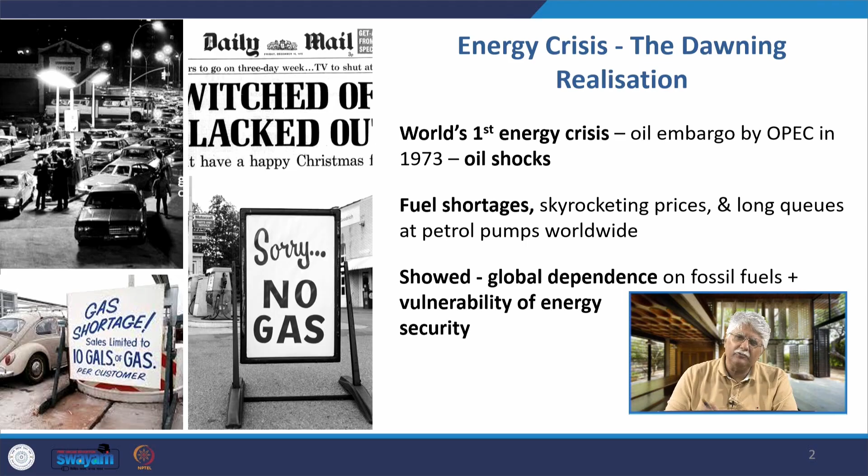If you want to look at the beginning of the whole problem, it began with the energy crisis the world faced for the first time in 1973. There was a dawning realization about the problem of energy. There was an oil embargo by the oil producing countries, the organization called OPEC, and this sent oil shocks all over the world. There were fuel shortages, skyrocketing oil prices, long queues at petrol pumps, and it showed there is a global dependence on fossil fuels and the vulnerability of energy security.

Then the impact of carbon emissions on climate. The damage from carbon emissions began to be understood from the 1960s, but there was a strong global recognition in the 1970s to 1980s. Early reports started coming out as early as 1979 with the report Carbon Dioxide and Climate: A Scientific Assessment, the Charney report. In the 1980s, there were private documents by oil companies like Shell and Exxon, kept secret, warning about climate change. Then important milestones came about.

In 1987, the Brundtland report came out, and that framed sustainable development, globally influencing building policy. In 1990, the first green building standard certification called BREEAM came out in the UK. BREEAM stands for Building Research Establishment Environmental Assessment Method. It focuses on energy, materials, pollution and health. In 1993, the US Green Building Council, the USGBC, was formed, and the LEED rating system was established in 1998. Around this time, concepts like life cycle energy and embodied carbon began appearing in research work.

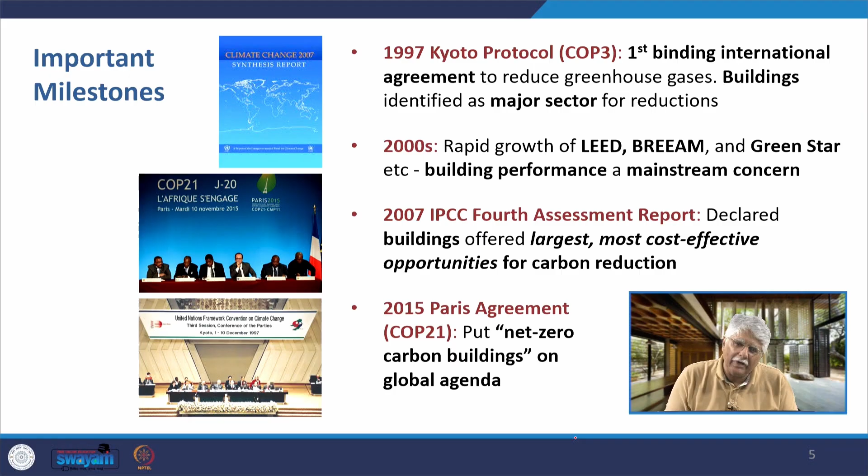Then an important milestone in 1997 was the Kyoto Protocol, called COP3, the first binding international agreement to reduce greenhouse gases, and buildings were identified as a major sector for energy reduction or carbon reduction. In the 2000s, there was rapid growth of LEED, BREEAM, Green Star, etc. Building performance became a mainstream concern, and in 2007, the fourth IPCC assessment report declared that buildings offered the largest, most cost-effective opportunities for carbon reduction. The 2015 Paris Agreement, COP21, put net zero carbon buildings on the global agenda.

Now, probably last year a UN report by the IPCC came out that declared what was called Code Red, that global temperature was likely to rise 1.5 degrees Celsius in the next 20 years. But 1.5 degrees Celsius from what? 1.5 degrees Celsius from the time of the Industrial Revolution. Global temperature would rise 1.5 degrees Celsius above the temperature during the time of the Industrial Revolution. If that happens, there will be irreversible climate change and global warming.

Already we are seeing the impact of tremendous climate change. Literally a climate change catastrophe is happening with extreme heat waves, drought, flooding, melting glaciers, rising sea levels, especially in areas where we never expected before. Floods, for example, in Frankfurt, droughts in areas that did not witness them before, forest fires are happening. So as a result of this, globally there have been caps established on the amount of carbon emissions nations can emit.

For India and China, the cap for bringing the country to net zero carbon level is 2070. That is, by 2070, India is striving to become a net zero carbon nation. Currently, in global carbon emissions, China is at the forefront with 27%, USA at 11%, and India is the third largest carbon emitter with 7%.

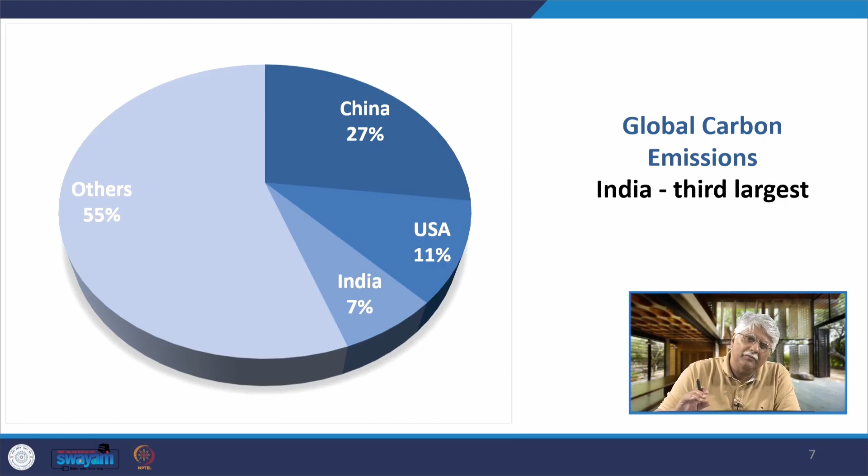Now, when we talk of carbon emissions or energy consumption in buildings, what are we really talking about? We are talking about two things. One is what is called the embodied carbon or embodied energy, that is the energy required to manufacture the materials used in construction and to transport them to the site of construction, the overall energy that is embedded in the materials.

The second is the operational energy or operational carbon, that is the energy that is consumed during the operation of the building. Data reveals to us that buildings contribute a total of 38% of carbon emissions globally. They are the major contributors according to the 2020 Global Status Report for Buildings and Construction by the United Nations Environment Programme.

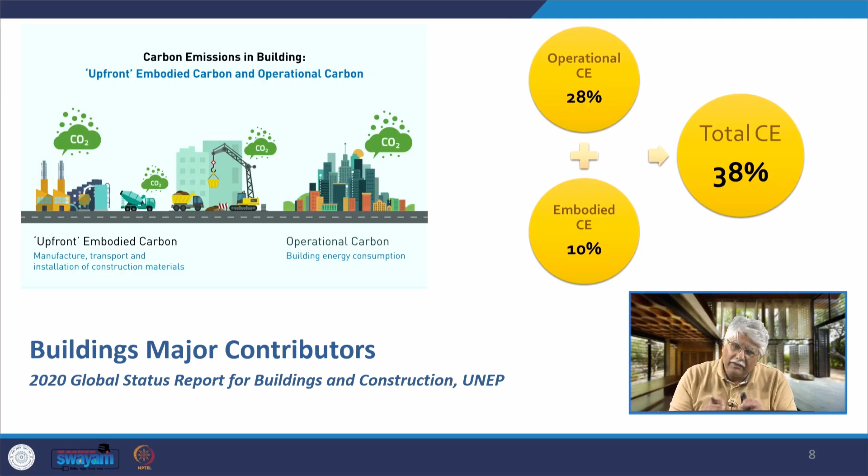So, that is why it is vital for us to target buildings to lower carbon emissions, to lower the energy that they consume. Now, in order to understand the difference between what is a sustainable building and what is a green building, the concept of sustainable development or sustainability incorporates three principal things. Number one is the environment, number two is the economic aspect, and number three is the social aspect or the people. All three put together lead to sustainability or sustainable development.

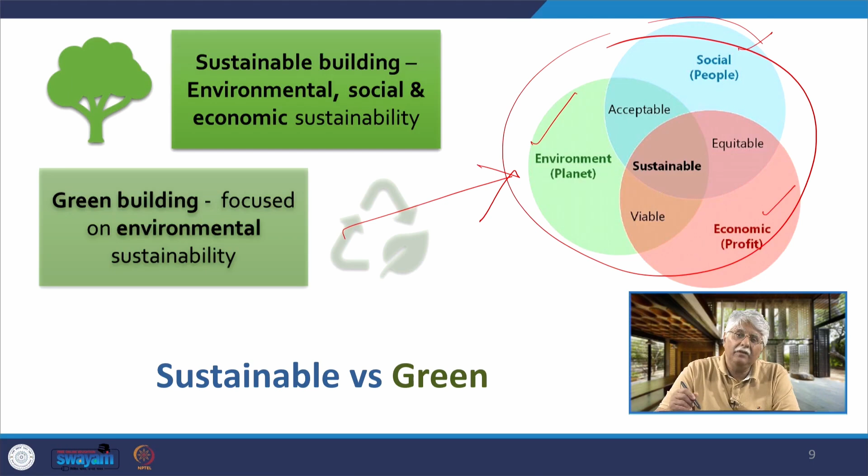But green buildings specifically focus on the environmental aspect of sustainability. That is the difference between being sustainable and being green. There has been a lot of impetus to make green buildings, and now we are also moving towards more and more sustainability. That means the social aspect and the economic aspect is also becoming important.

In fact, when we look at the sustainable development goals that were set up in 2015 by the United Nations General Assembly, they were intended to be achieved by 2030. Out of these SDGs, there are 9 SDGs that are a direct impact of green buildings. So what is a green building? I will give you very simple definitions. You can go and read the detailed definitions later.

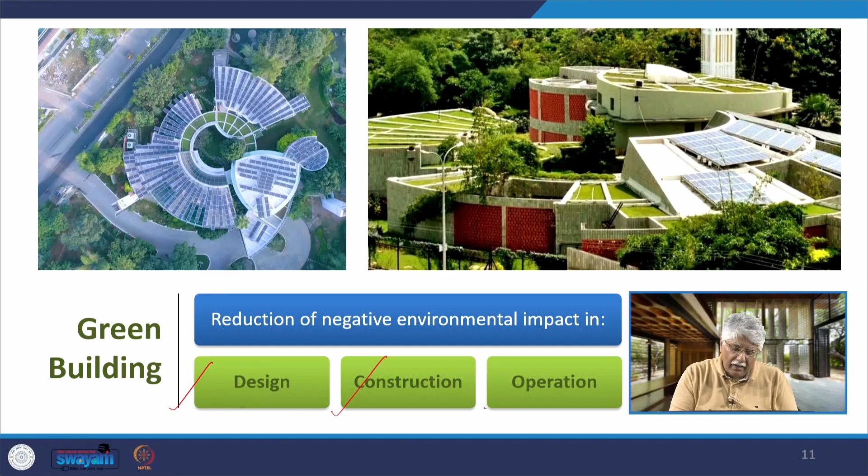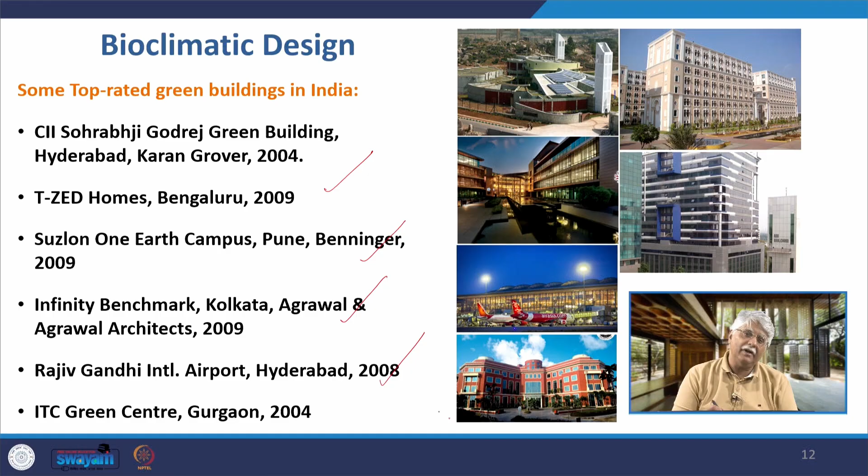So, a green building is the reduction of the negative environmental impact through the design, the construction and the operation of a building. When we talk of bioclimatic design, there are some top rated green buildings that we have in India. The one we will be looking at is the CII Godrej building in Hyderabad by Karan Grover. Then there is the T-ZED Homes in Bangalore, Suzlon One Earth campus by Christopher Benninger in 2009, Infinity Benchmark in Kolkata, the Rajiv Gandhi International Airport in Hyderabad, the ITC Green Center in Gurgaon in 2004.

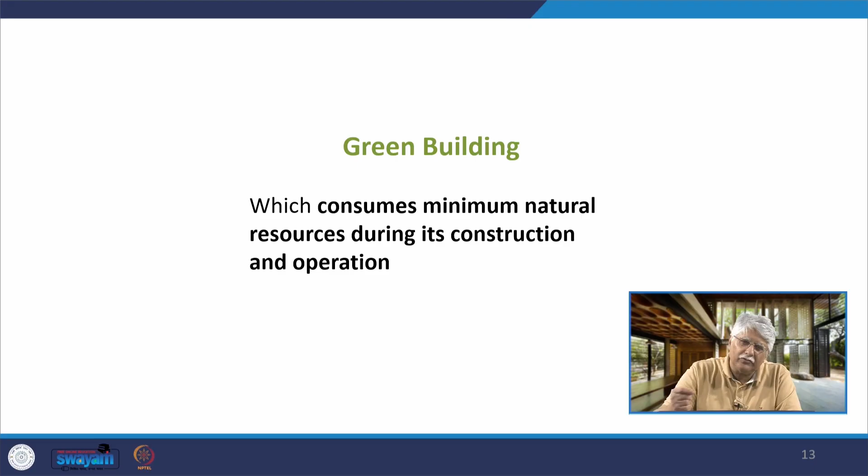So, a green building is that which consumes the minimum natural resources during its construction and operation. In a green building, there is increasing efficiency with which buildings use resources, energy, water and materials, while reducing the building's impact on human health and environment through better siting, better design, better construction, operation, maintenance of the building, and finally the demolition and removal of the building. The entire building life cycle is a model of a green building.

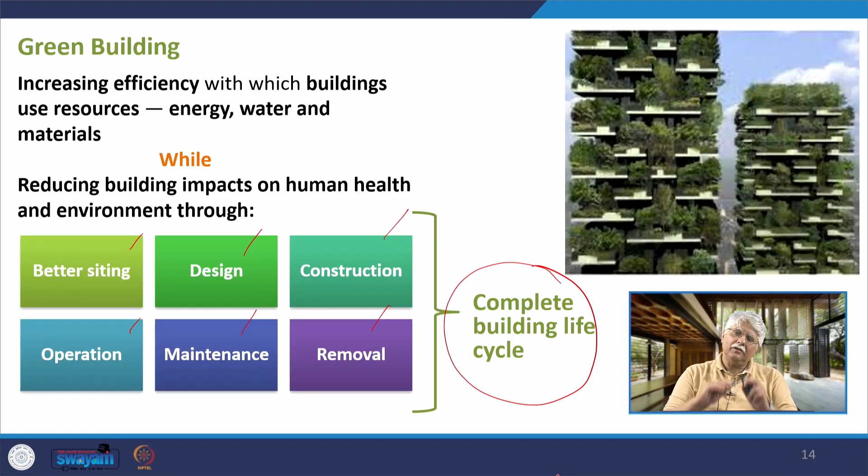So, when we talk of life cycle energy requirement, again we will look at these two things I have just mentioned: the embodied energy, which is the energy needed to quarry, manufacture and transport materials used in building construction. Operation energy is the energy to operate the building used by occupants for heating, cooling, ventilating, lighting, operating equipment, etc. in the building. How do you reduce operating energy?

Today in this presentation we are not looking at the embodied energy, embodied carbon aspect of it, though that is also considered; more energy efficient, low carbon materials need to be used as a part of the overall green building concept. But when we talk of operating energy, two things are important. One is energy saving. How do you save energy? There are passive and active means to save energy in a building.

By improving insulation, by automated ventilation controls, that is the active part, by lighting control using natural light, by lighting control using motion detection sensors, by high efficiency light fixtures, by rooftop planting, which are called roof gardens today. Through all this we are trying to save energy. The second part is energy making through, for example, photovoltaic generation, use of solar PV panels. So on one side we are saving energy, we are lowering the amount of energy the building consumes. On the other side we are making energy.

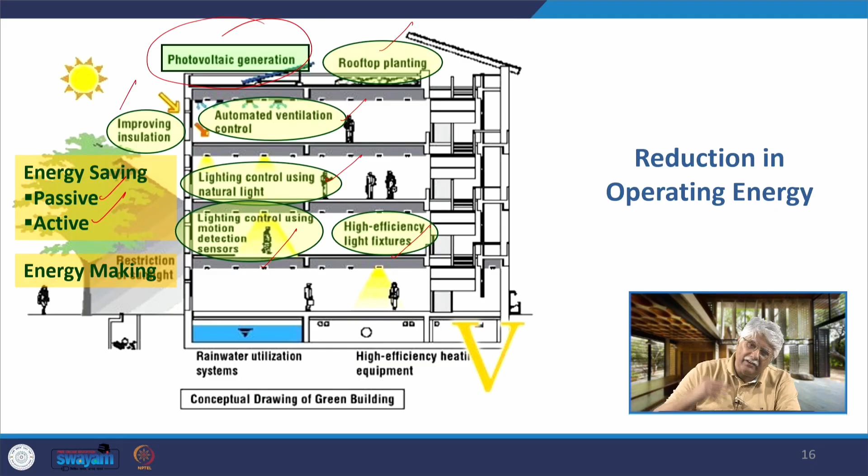Why make buildings green? Not only is it important because of the most critical issue that we need to lower carbon emissions, but also studies reveal that productivity gains up to 16% happen with green buildings because they reduce absenteeism, they improve the work quality and the overall indoor environmental quality. Therefore, there are environmental, economic and social benefits for all building stakeholders. So here we are actually looking at the very essence of sustainability.

Though it is a green building, it is also impacting economic and social aspects, because there is less absenteeism, the indoor environment is better, people find it better to work. Economically that benefits the companies or the corporations. So owners, occupants, general public, everybody benefits with these green buildings.

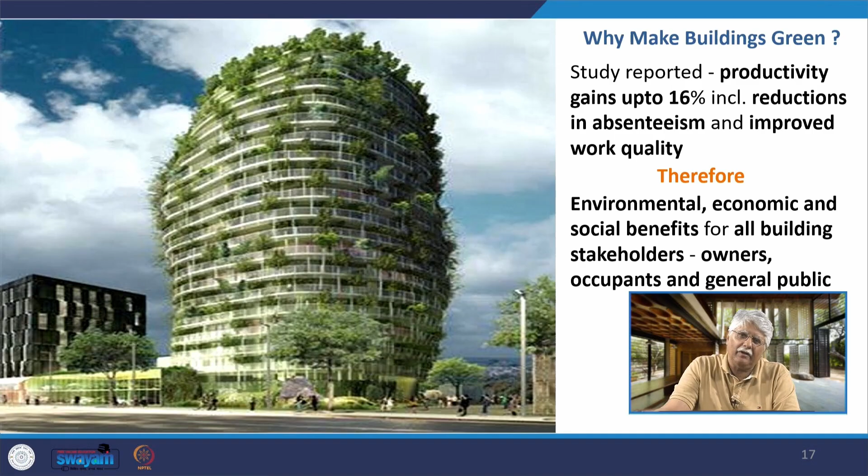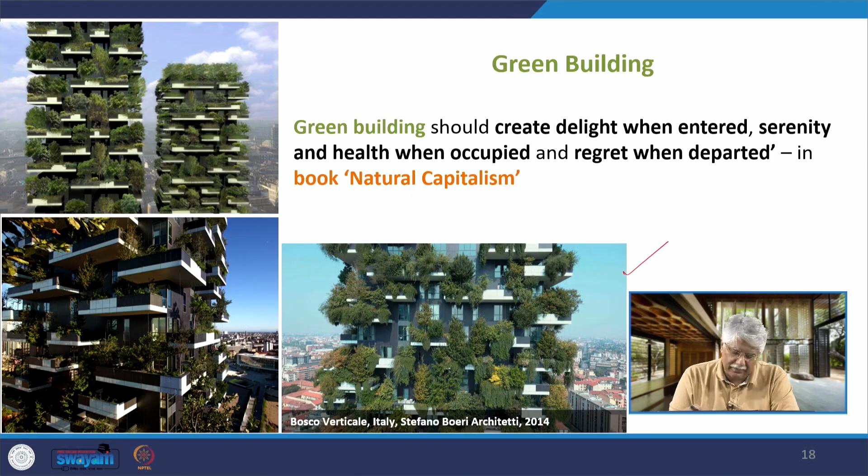Green building should create delight when entered, serenity and health when occupied, and regret when departed. This is a statement from the book called Natural Capitalism. The building that you are seeing in this slide is the Bosco Verticale, the vertical forest in Italy by Stefano Boeri Architetti in 2014. There is another building, the One Central Park in Australia by Jean Nouvel, another green building in 2014.

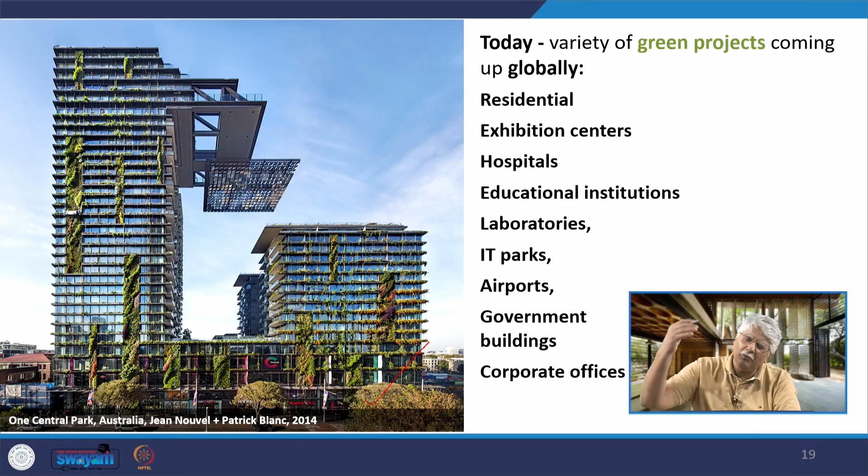Today there are a variety of green projects coming up globally: residential, exhibition centers, hospitals, airports, laboratories, IT parks, corporate offices, government buildings, so many building typologies in which green buildings are being made. Why are people attracted to green buildings?

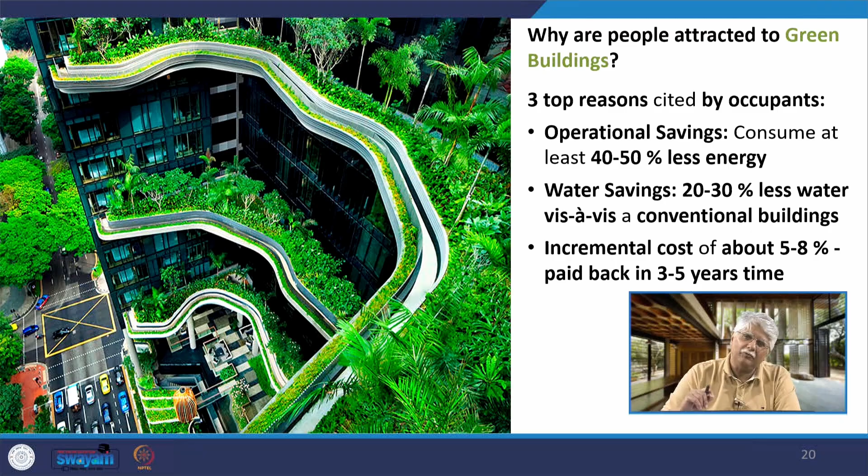The top 3 reasons are, of course, operational savings, 40 to 50% less energy is consumed. There are water savings, 20 to 30% less water vis-a-vis a conventional building. The incremental cost of making a green building, 5 to 8% over and above a conventional building, is paid back in 3 to 5 years, what is known as the payback period.

So there are better daylight and views. Like I said, the working environment improves, access to daylight and views is there, productivity of the people goes up, air quality improves, it is fresh and healthy. Interior materials are also used in a way that they have low carbon emissions.

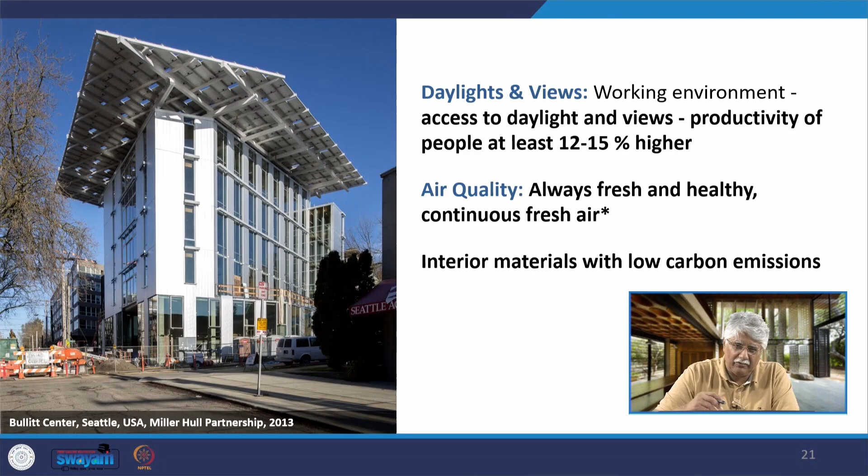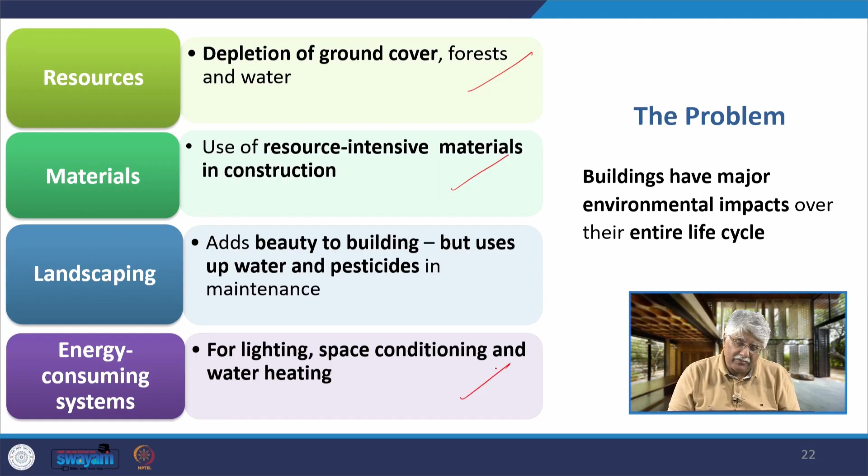Now the problem was that buildings have major environmental impacts over the entire life cycle. Resources: they cause depletion of ground cover, forest and water. Materials: we use resource intensive materials in construction. In landscaping, though they add beauty to the building, we use water and pesticides for the maintenance of the landscape. We use energy consuming systems within the building. We use high-tech controls, building management systems that add intelligence to the buildings but require a lot of energy.

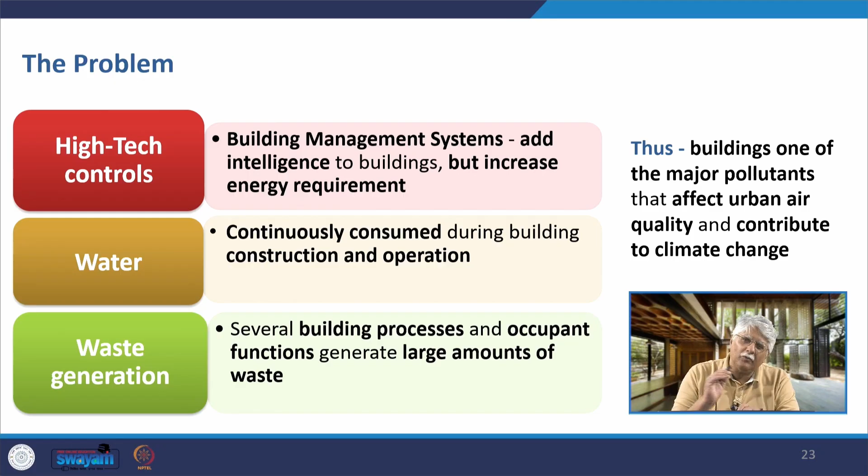Water is continuously consumed during building construction as well as operation, and there is waste generation. Several building processes and occupant functions generate large amounts of waste. Thus, buildings are one of the major pollutants that affect urban air quality and contribute to climate change.

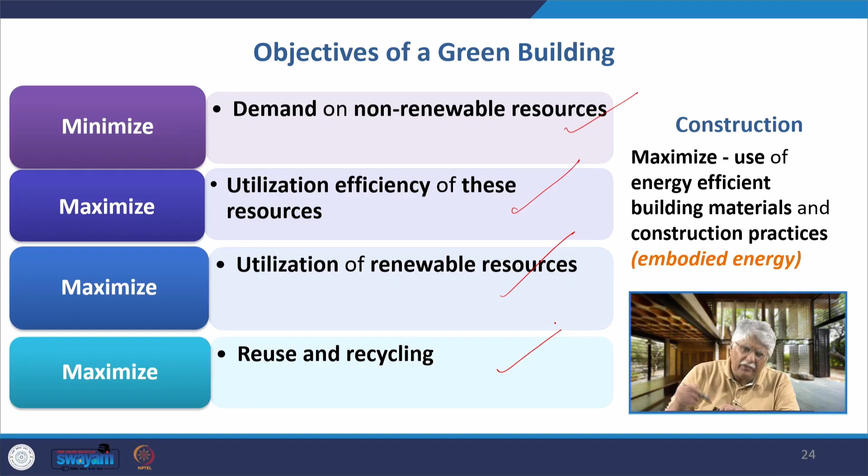That is why the objective of the green building is to maximize the use of energy efficient materials and construction practices. So, minimize the demand for non-renewable resources, maximize the utilization efficiency of the resources we use, maximize the utilization of renewable resources, and maximize reuse and recycling. All these concepts are evolving even further today.

So we come to the CII Godrej Green Building Center in Hyderabad. Why is this an important study? Not only for Indian architecture but global architecture, because this is the first structure outside of the USA to receive a platinum LEED rating. In this presentation, I am not giving you the entire description of the LEED and GRIHA green building certification. You can read it up, but the LEED rating was given earlier by the USGBC, now we also have the Indian Green Building Council, the IGBC.

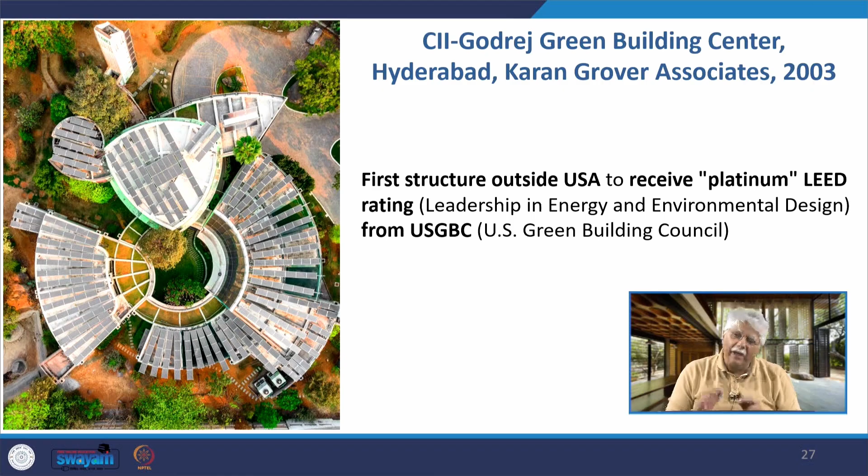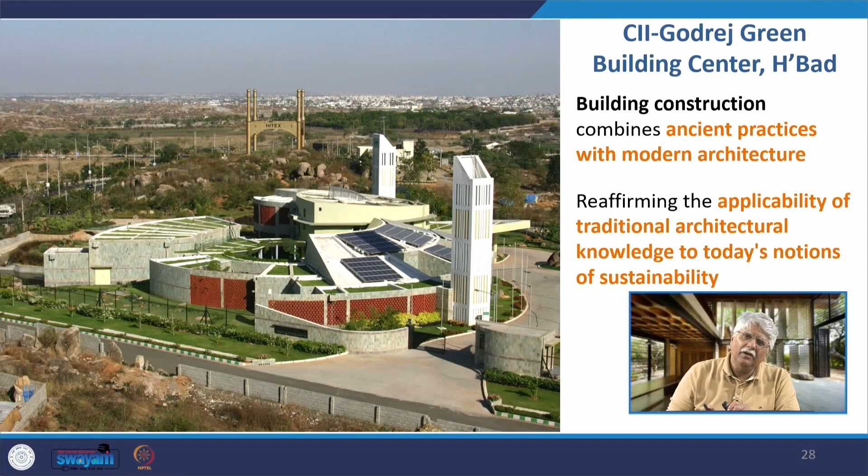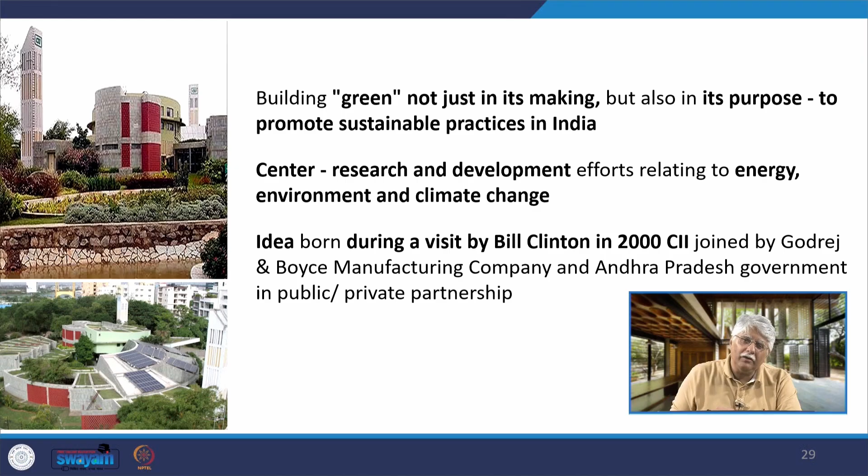The CII Godrej building combines ancient practices with modern architecture, reaffirming the applicability of traditional architectural knowledge in today's notions of sustainability. The building is green not just in its making but also in its purpose to promote sustainable practices in India. The center is for research and development related to energy, environment and climate change, and the idea was born during a visit by the then President of America Bill Clinton in 2000.

Karan Grover Associates in Baroda are the architects behind it; they developed a design scheme to respond to both the cultural and the environmental context. The building was to be a showcase for energy efficient, eco-friendly architecture, an integration of age-old practices with sustainable practices using modern technologies.

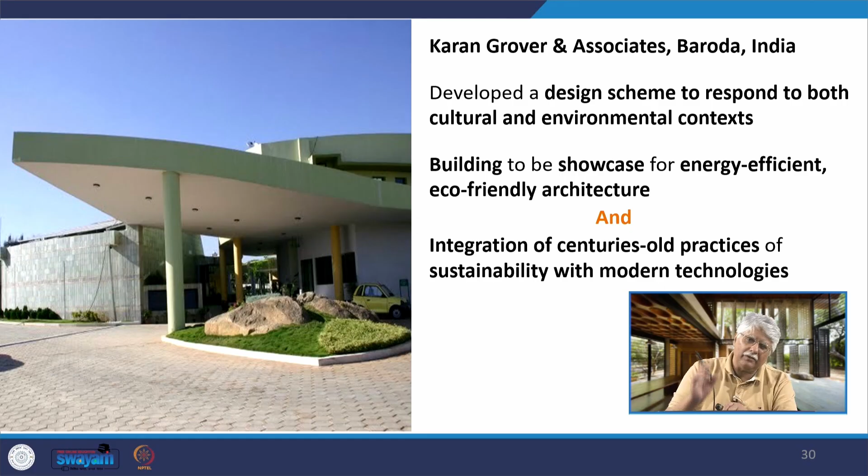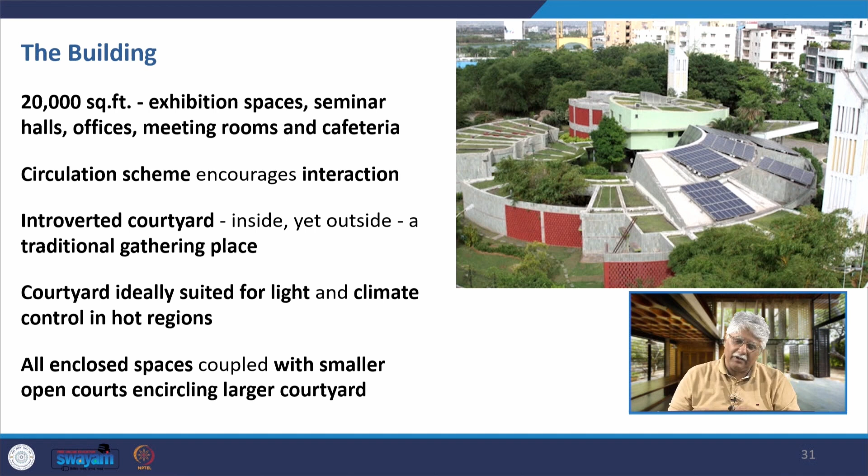The building is 20,000 square feet of space with a circulation scheme that encourages interaction. It's got introverted courtyards, inside yet outside, leading to traditional gathering spaces. They're ideal for bringing natural light into the building and for climate control in this hot region. All enclosed spaces are coupled with smaller open courts which encircle the larger courtyard.

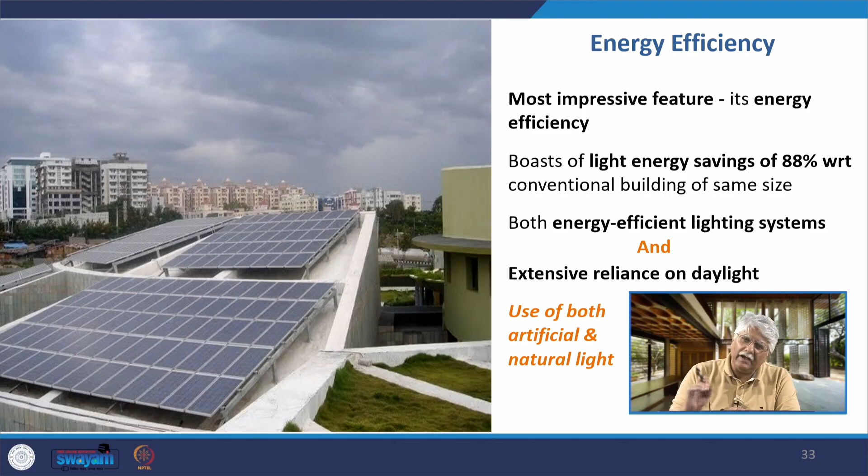When light is insufficient, sensors trigger energy efficient electric lights. There are also dimmers that automatically control illumination levels, turning lights off when it is unnecessary. There are occupancy sensors that prevent lights from being switched on at unoccupied workstations.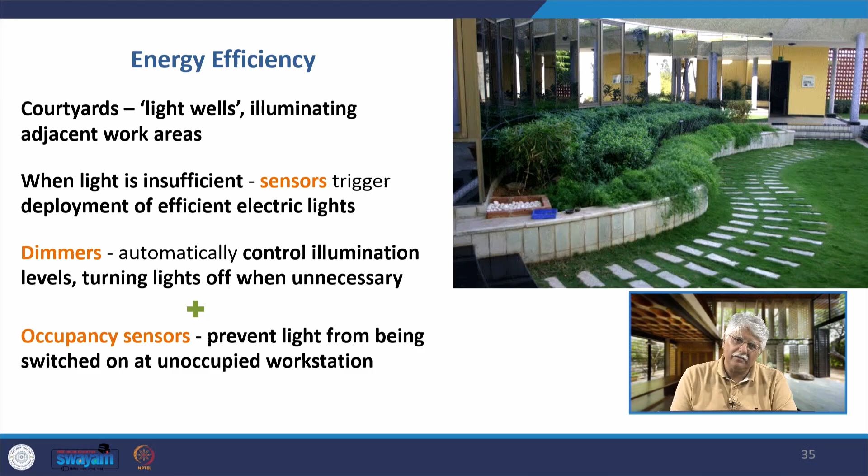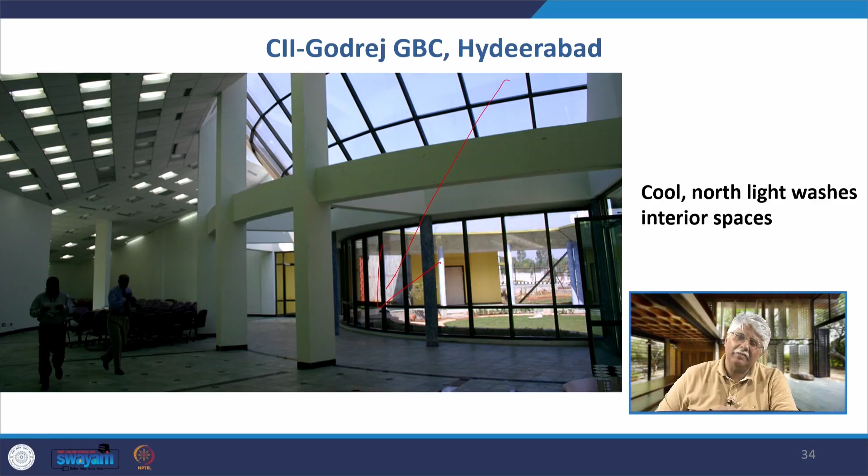Please also remember that this building was made much earlier, in 2003. Over this time, much more development has taken place in green building or energy efficient design. Far more new strategies are now being implemented, but we are looking at it as an important landmark in green building design in India. The building layout ensures that 90% of spaces have natural light access and views to the outside.

In some areas, jalis are used to prevent glare and heat gain while ensuring adequate daylighting and views. The jali also gives aesthetic appeal to the space. A contemporary strategy for energy efficiency is the use of solar photovoltaic cells. There is a rooftop grid that provides about 24 kilowatts; approximately 16% of the building's electricity needs are met through the solar PV panels.

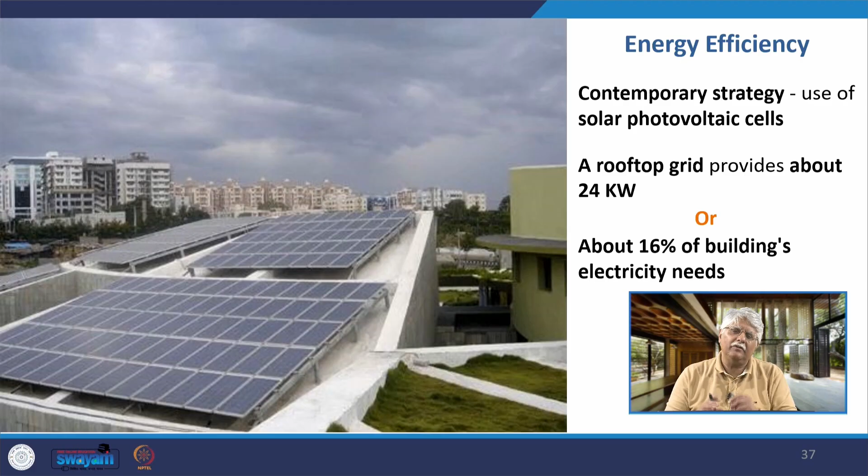And for energy efficiency, another traditional method from the Middle East has been used, that is these two wind towers that you see here. These wind towers are traditional elements that catch air at a height and cool it as it passes down the tower. That cooled air is then pumped into the HVAC system, or the air handling unit of the air conditioning system, and this air has been cooled by up to 8 degrees Celsius, bringing about a substantial reduction in the air conditioning load. The roof itself is heavily insulated and reduces the overall cooling load.

Just to repeat this again, the hot air from the top is pulled into the tower, and as it comes down it is pre-cooled within the tower, and this cooled air is fed into the AHU.

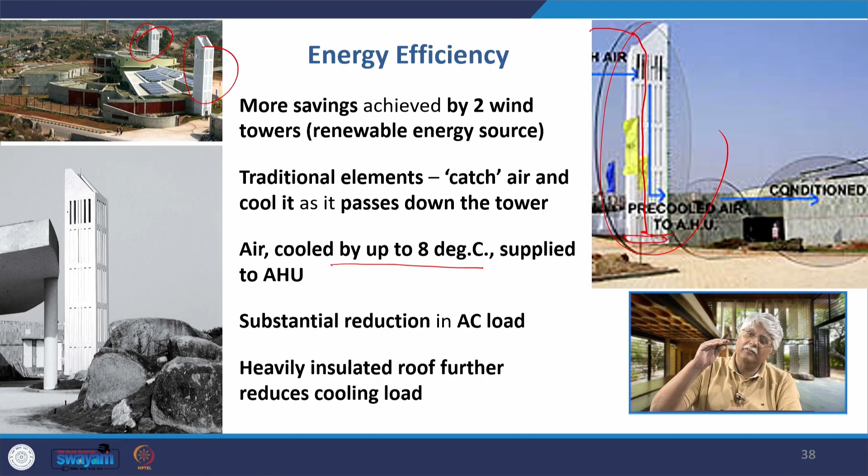So now what happens? For example, if the outside temperature is 45 degrees, the air conditioner has to work to bring that temperature down to, let's say, 26 degrees Celsius within the building. That is approximately 19 degrees of temperature drop that has to happen. But because of this system, that 19 degrees becomes just about 11 degrees Celsius, and that tremendously lowers the cooling load of the building. There is also sensitivity to the context.

Part of the green task is to minimize damage to the natural elements during construction and occupancy. Water flow, air quality, vegetation, topography, all aspects are looked at. The building form responds to a rocky site. The footprint of the building is kept small. The arrangement of spaces and varying levels of plinth are designed to respect the distinctive boulders. That is, the topography of the site is kept as intact as possible.

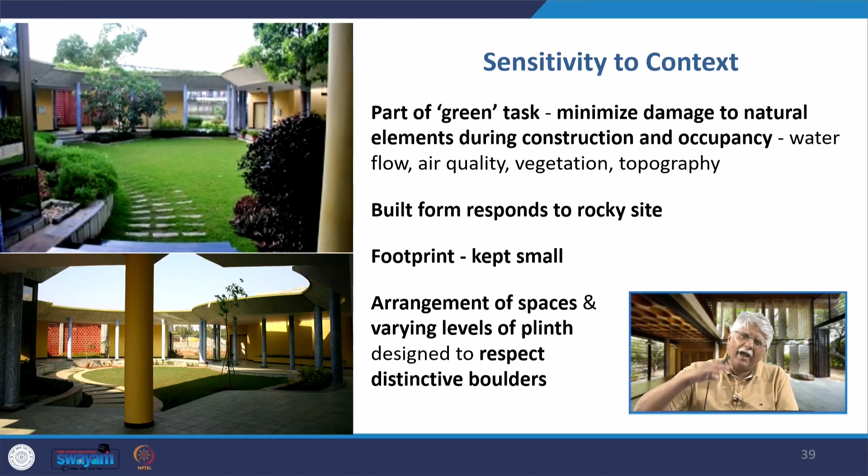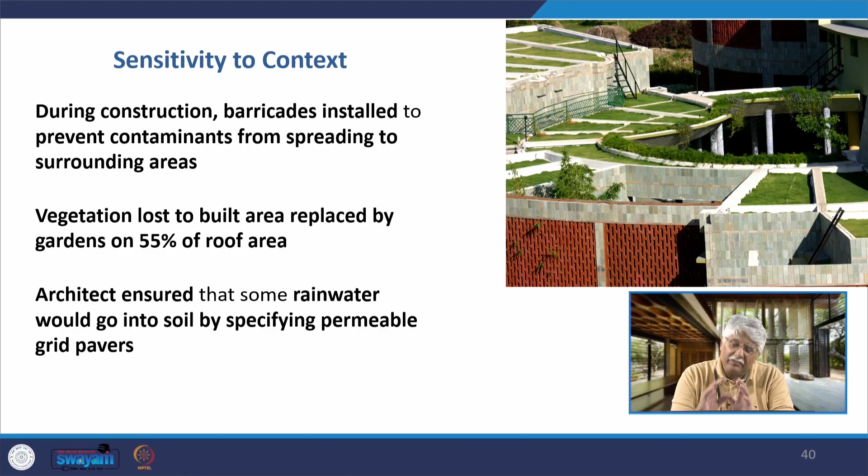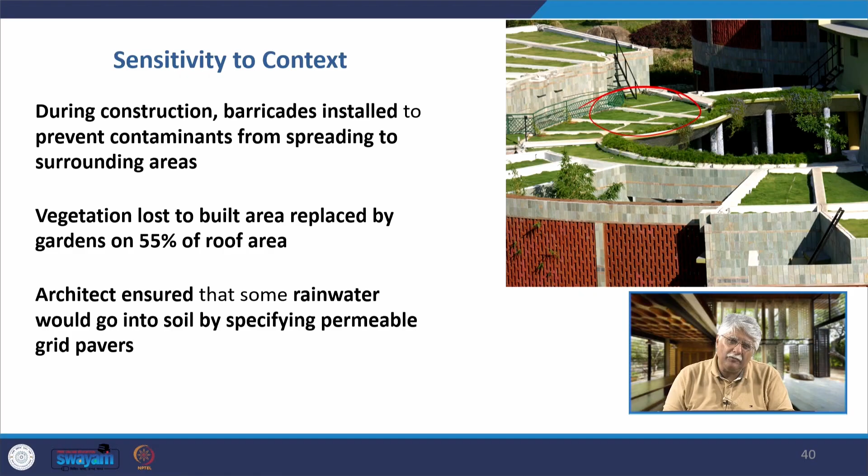During construction, barricades were installed to prevent contaminants from the site from spreading to the surrounding areas. The vegetation that was lost to the built area was replaced by rooftop green spaces or roof gardens, up to 55%. The architect ensured that some rainwater would go into the soil by specifying permeable grid pavers. The remaining rainwater follows the existing flow pattern of the site and is collected in a water pond. Another traditional method is that it is constructed at the lower end of the site.

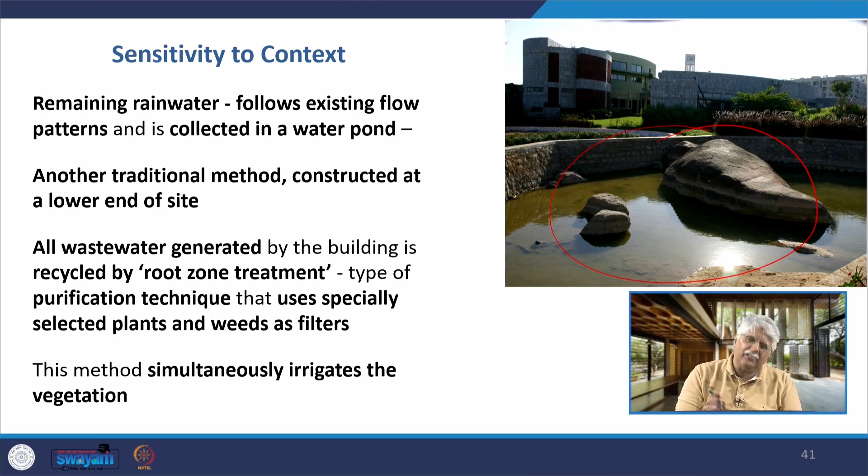All wastewater generated by the building is recycled by what is called root zone treatment. That is a purification technique that uses specially selected plants and weeds as filters. This method simultaneously irrigates the vegetation also. Treated water is also directed to the pond and used for domestic purposes. In addition, the building achieves a 35% reduction of municipally supplied potable water, in part by using low flush toilets and waterless urinals.

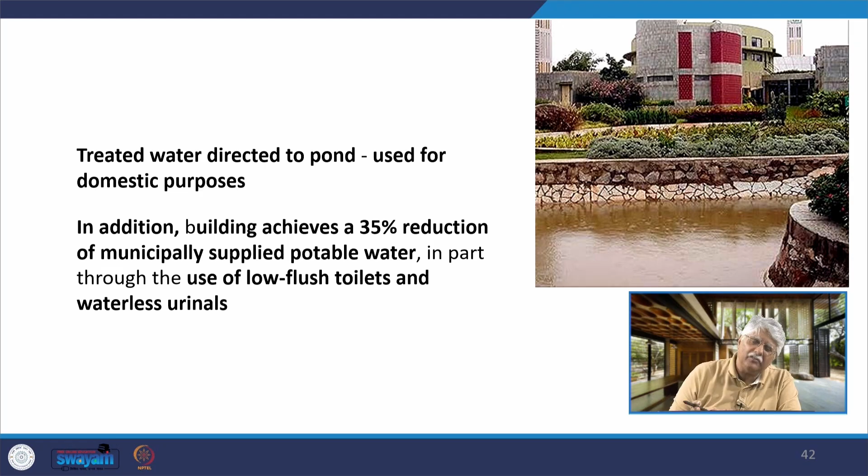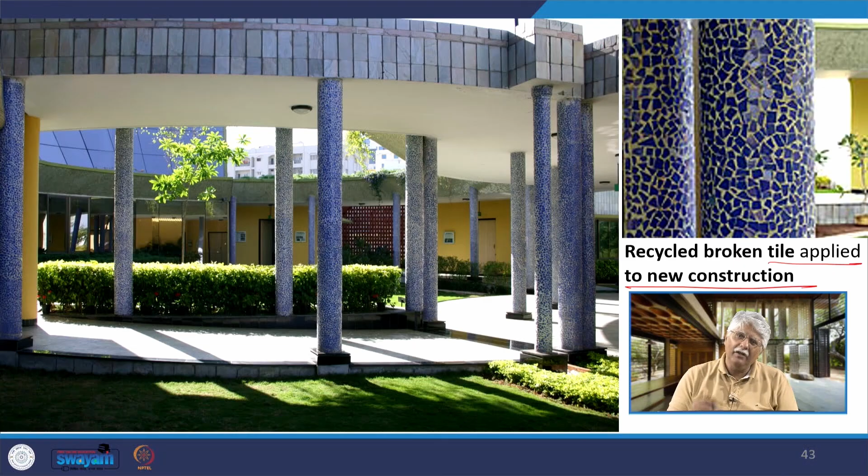Another aspect is, for example, the broken tiles from construction are reused by applying them on the columns as trencadís. I have already talked about it in the works of Gaudí, etc. The trencadís, the use of broken tiles.

Again, the sensitivity to context: so now shifting from the building to how occupant behavior is controlled, the building occupants are encouraged to minimize their reliance on fossil fuel based transportation. The building is located near a public transport station, so people can use public transport to come to work. Bicycle riders are treated preferentially. They are provided facilities like convenient parking, lockers and showers.

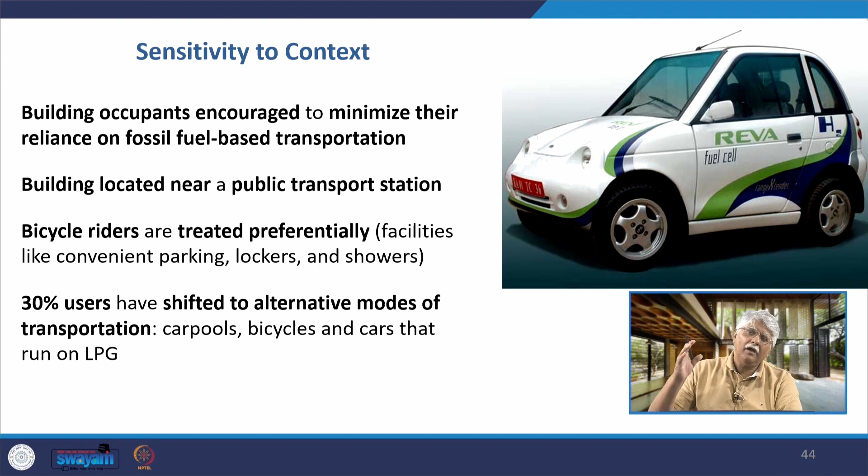30% of users have shifted to alternative modes of transportation like carpools, bicycles and cars that run on LPG. And I am talking about 2003. The center bought locally made electricity driven cars called Reva in the hope that employees will buy alternate energy powered cars in the future. Now this is an old story, because today EV cars are becoming very important even in our country. All over the world we are moving towards a situation where most of our vehicles will be EVs.

Documented reduction of harmful emissions through design, siting and construction indicates at least 62% in carbon monoxide, 63% in hydrocarbons and nitrogen oxides. That kind of reduction has happened through this building. This demonstrates that traditional knowledge is valid today and it can be used in conjunction with modern architecture to achieve these levels of sustainable design. It's earned a very high LEED rating of 56 credits, a platinum rating, which urges us not to turn our backs to history in our quest for modernity.

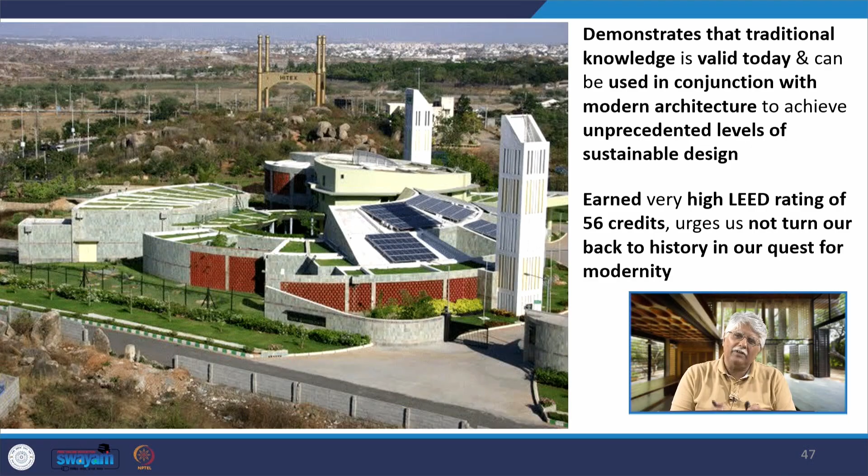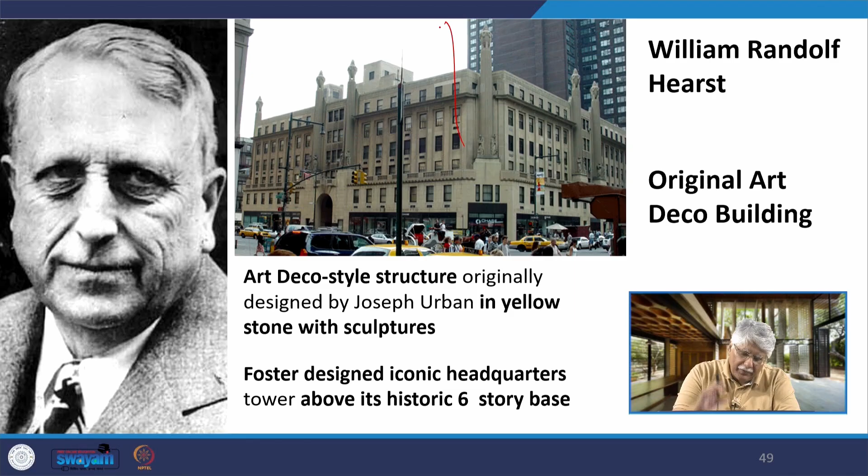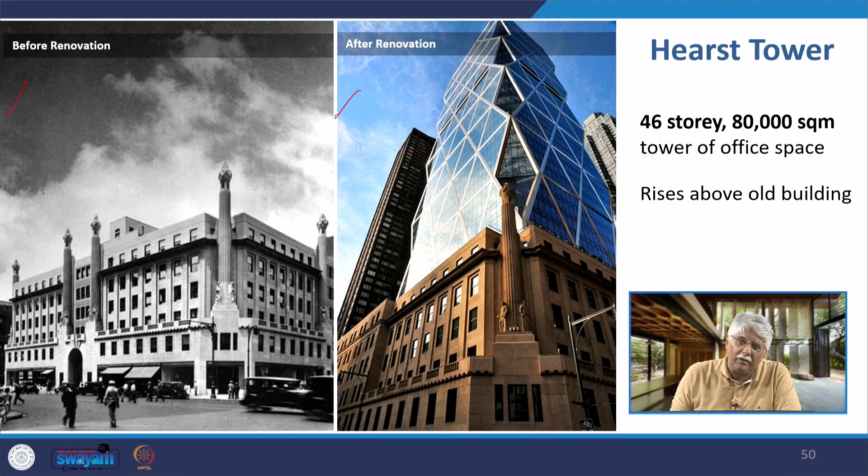So this building in 2003 formed a benchmark of green building design, but like I said, a lot of other developments have happened over time. Let's look at a benchmark building of 2006, the Hearst Tower in New York by Norman Foster, a green high-tech building. The earlier building there was the building by William Randolph Hearst, an Art Deco structure originally designed by Joseph Urban, and Foster designed his iconic tower above it while keeping intact the 6-story base. So this is the before renovation picture, this is the after renovation picture. A 46-story building, 80,000 square meters of office space, rises above the old building.

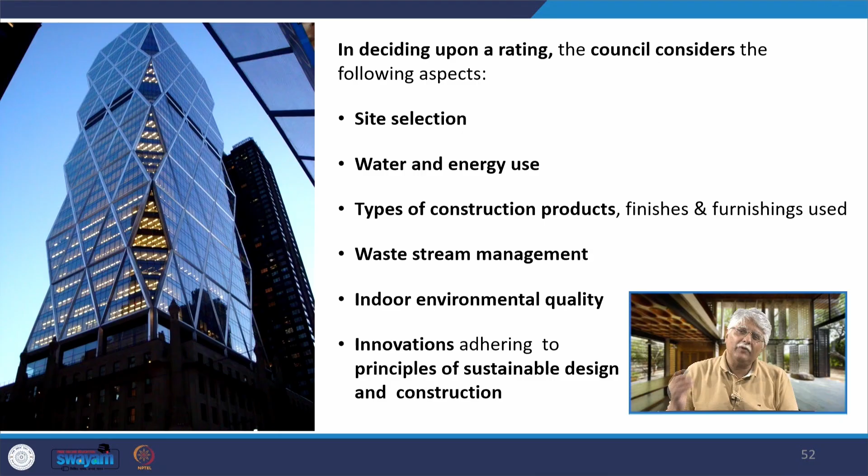A pioneer in environmental sustainability, it was the first commercial office building in New York City to receive the gold LEED rating for core and shell interiors. In deciding upon the rating, the council considers aspects like site selection, water and energy use, indoor environmental quality, the type of construction products used, etc. Over 90% of the structural steel used in this building has come from recycled material. About 85% of the original structure can be recycled for future use.

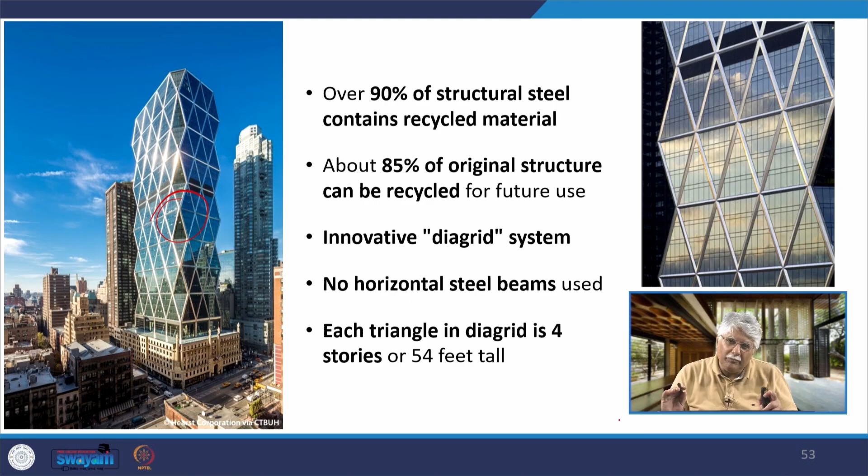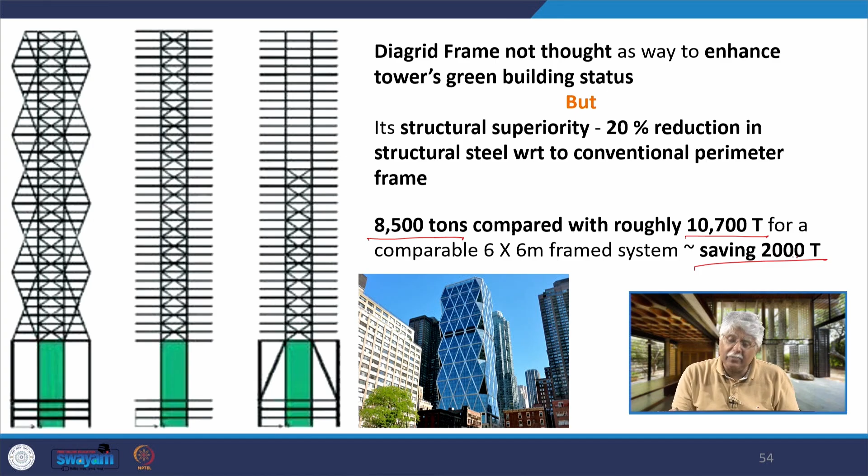It has an innovative diagrid system. We have already seen this in the Gherkin, or the Swiss Re building, also by Norman Foster in London. There are no horizontal steel beams used. Each triangle in the diagrid is 4 stories or 54 feet tall. The diagrid frame was not thought of as a way to enhance the tower's green building status, but the structural superiority of the diagrid reduced the overall steel required by 20%. That is, this building uses 8,500 tons compared to roughly 10,700 tons for a comparable building of this size, saving 2,000 tons of steel, a major contribution towards its green building status.

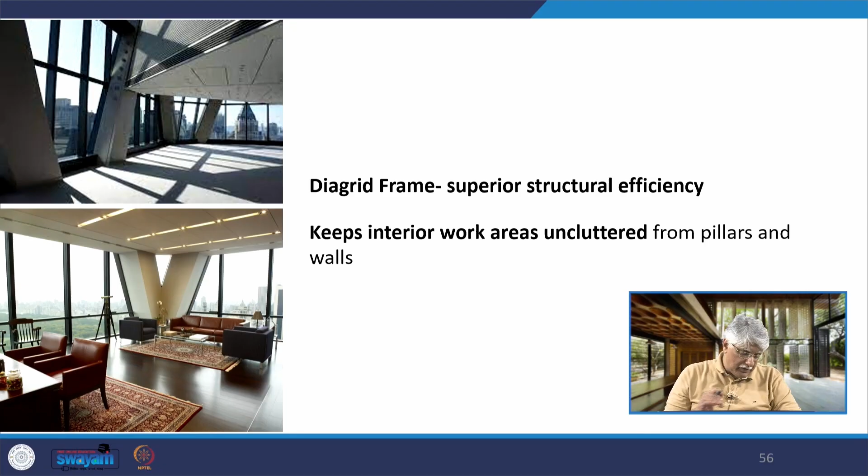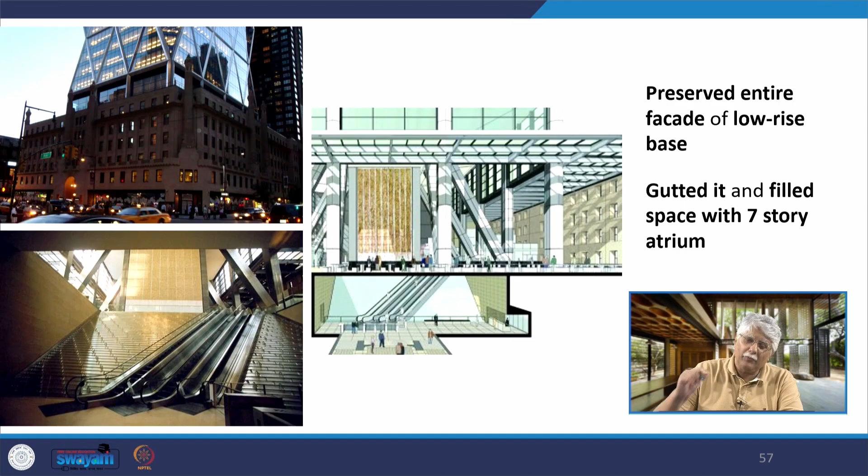This is how the form of the building evolved, the diagrid frame, and the diagrid frame also has superior structural efficiency. For example, it keeps the interior work areas uncluttered from pillars and walls. Now, the entire facade of the low-rise base has been preserved. It was gutted and filled with this 7-story atrium. The lobby with the atrium occupies the entire floor plate and rises the 6 stories of the old building, and has the main elevator lobby, cafeteria, auditorium, etc.

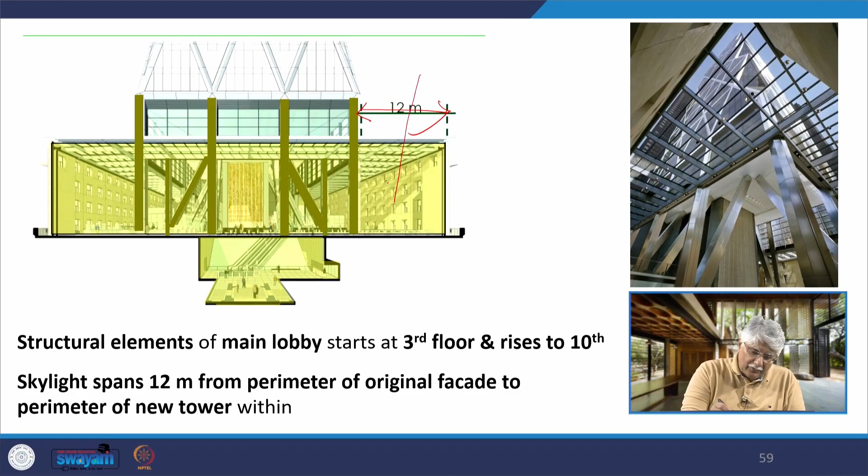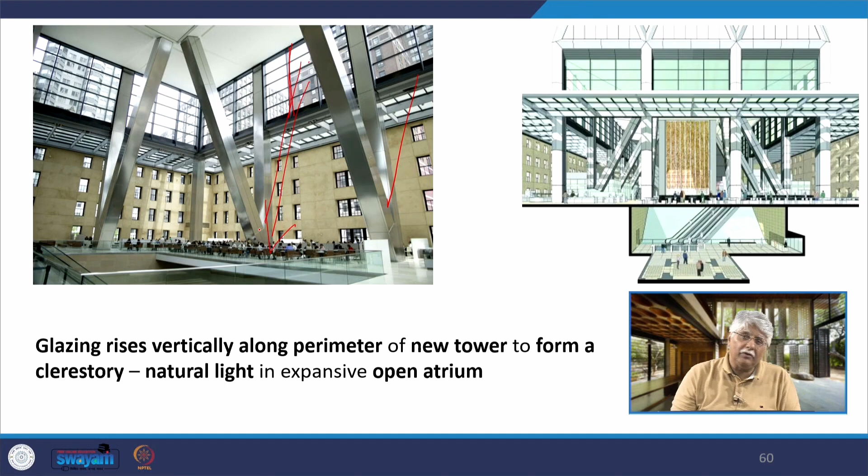And there is a transparent skirt of glazing, as you see here, which brings natural light into this space. The structural elements of the main lobby start at the 3rd floor and rise up to the 10th floor. This is the 12 meters of glazing that has been provided, the skylight, and it provides natural light into the building. Along with that, there is glazing rising like a clerestory window on the perimeter of the new tower, and this also brings in natural light. So, from the skylight and the clerestory window, natural light floods into the 7-story atrium space. This is how the atrium is, the clerestory, the skylight, the diagrid, how the structure has been formed.

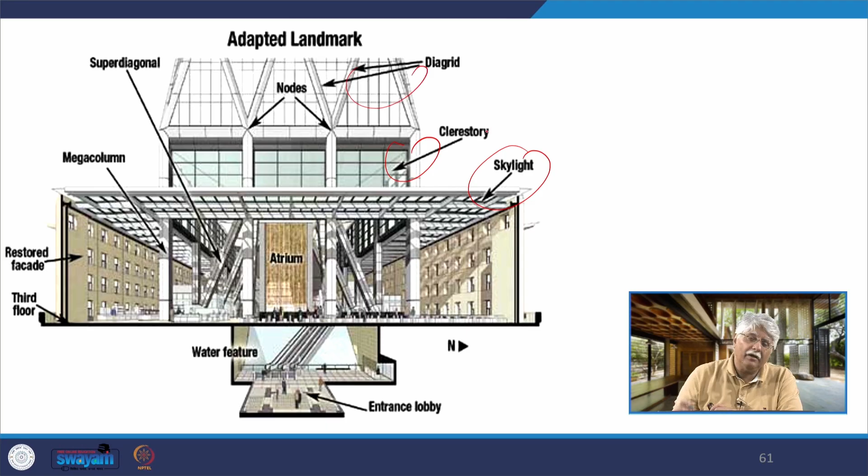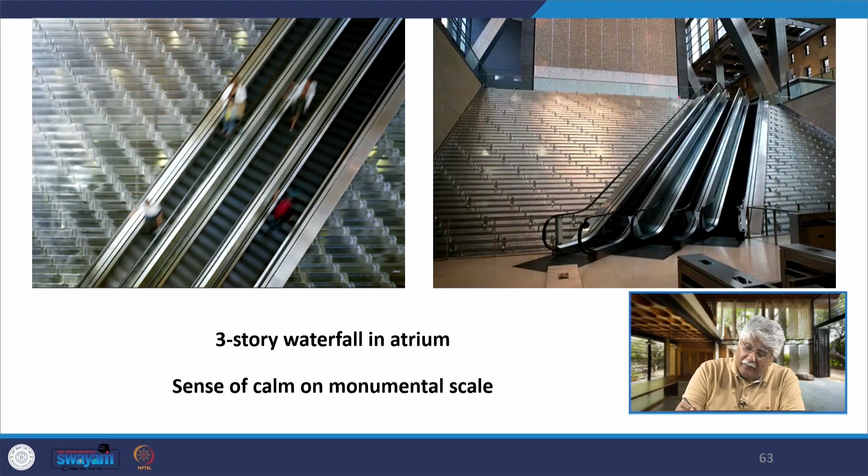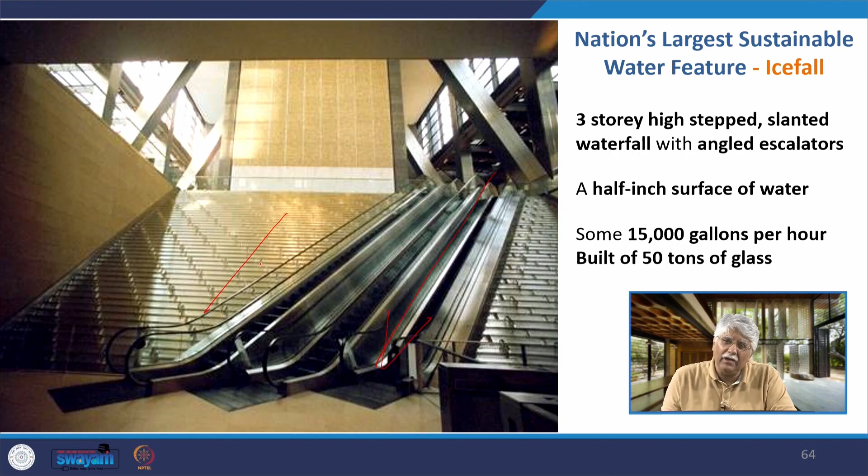So the lobby is the celebratory communal space, it is a town square, and there is also a 3-story waterfall provided in the atrium called the Icefall, and the sense of calm in this monumental scale. It is the nation's largest sustainable water feature: a 3-story high stepped, slanted waterfall with these angled escalators. There is a half-inch surface of water and some 15,000 gallons per hour of water. It is built of 50 tons of glass.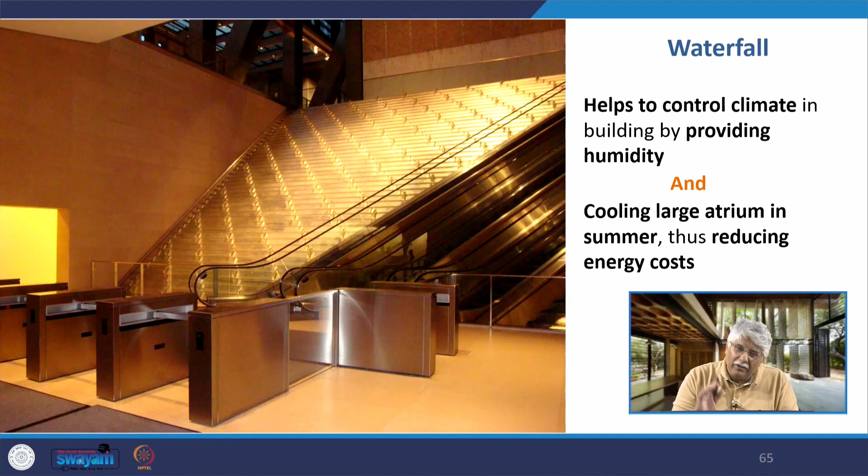The waterfall helps to control the climate in the building by providing humidity and by cooling the large atrium in summer, thus reducing the energy cost of the building. The environmental strategies used in this building: there is rainwater harvesting, low emissivity glass facade, daylight sensors, activity sensors, high efficiency heating and air conditioning. They utilize outside air for cooling and ventilation up to 75% of the year.

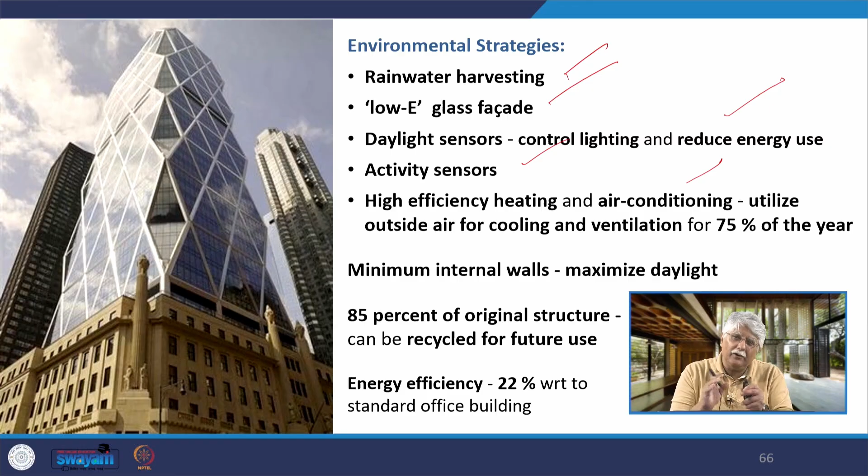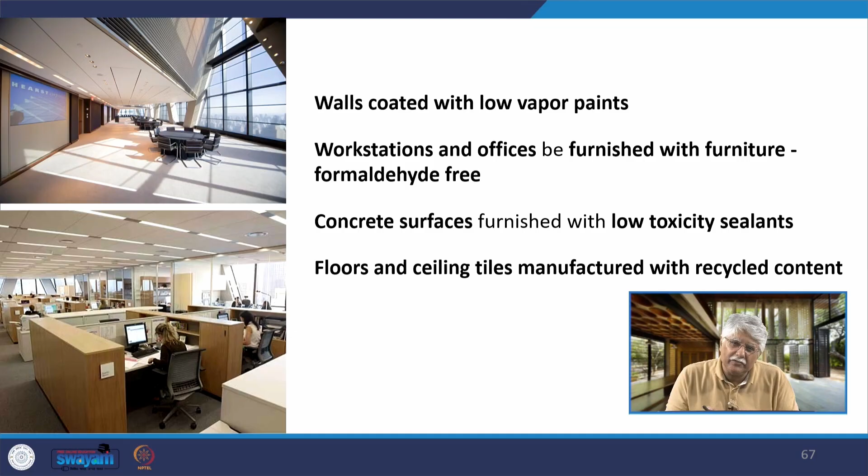Minimum internal walls that maximize daylight penetration in the building. 85% of the original structure can be recycled. Energy efficiency of 22% with respect to a standard office building. Walls are coated with low vapor paints. Workstations and offices are furnished with furniture which is formaldehyde free. Concrete surfaces are finished with low toxicity sealants. Floors and ceiling tiles are manufactured with recycled material.

Therefore, it got the International High Rise Award in 2008. Sustainable office, the first green building in New York to receive the gold LEED rating of core and shell, an iconic building, yet a very environmentally responsive tower. With regard to energy efficiency, Norman Foster has been at the forefront in making buildings that bring about energy efficiency. Then we have the CH2 in Australia.

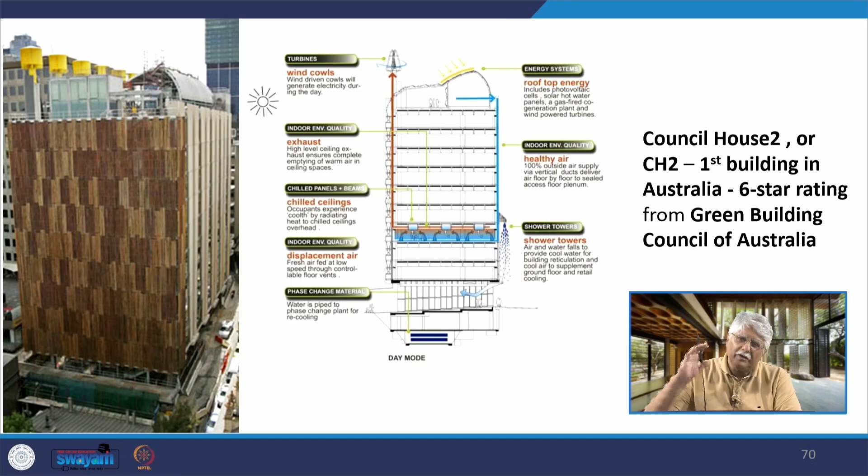We'll quickly rush through it. This is the first building in Australia that got the 6-star rating on the Green Building Council of Australia. There are wind power turbines that cool the building at night. Chilled ceilings are used. The building power system includes photovoltaic cells, solar hot water panels, a gas powered cogeneration plant. A cogeneration plant is one where the fuel that is used to produce the electricity, the heat from that same fuel is reused again for other purposes within the building.

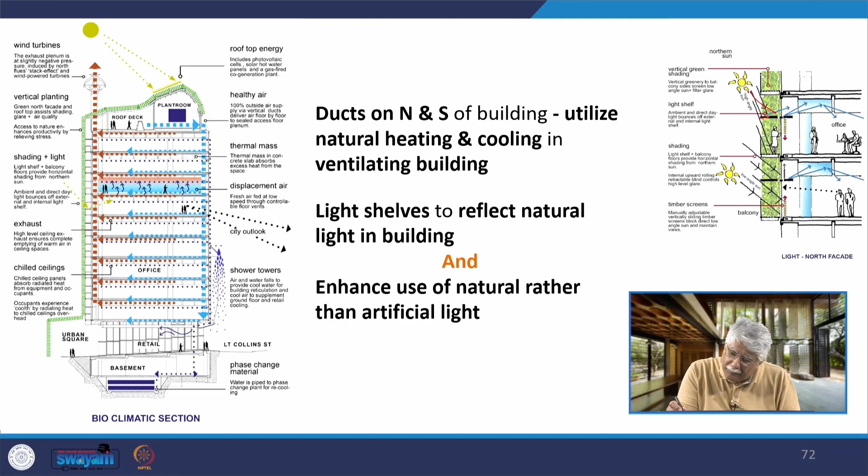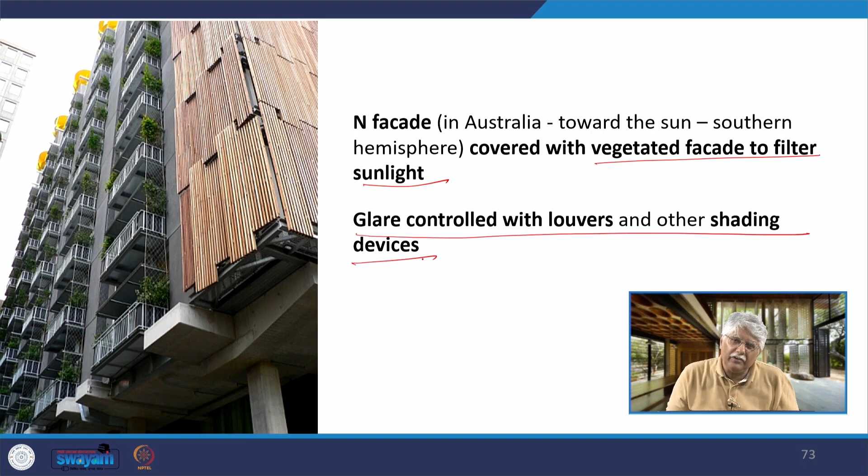The ducts are on the north and south of the building that utilize natural heating and cooling in ventilating the building. There are light shelves provided here that bounce light into the building, increasing the overall natural light in the interior. Because Australia is in the southern hemisphere, it is the north facade that gets the maximum light. In our case, that would be the south facade in the northern hemisphere. Therefore, it is covered with the vegetated facade to filter the sunlight, and the glare is controlled with louvers and other shading devices. Recycled timber louvers are used and are controlled by photovoltaic cells.

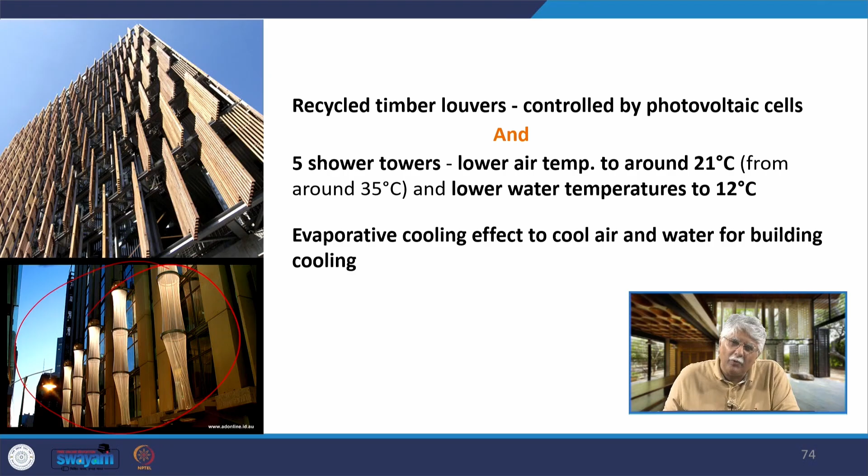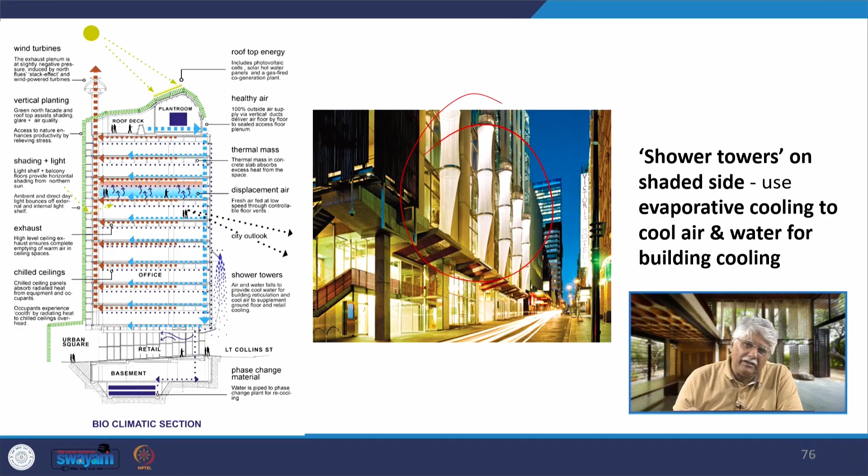There are these 5 shower towers that have been provided to lower the air temperature to around 21 degrees centigrade and to lower the water temperature to 12 degrees centigrade, an evaporative cooling effect to cool both air and water for the building cooling. Recycled timber louvers have been used, and these are the shower towers. On the shaded side, they use evaporative cooling to cool both air and water for the building cooling. Please read the detail about this building, you will understand about the shower towers.

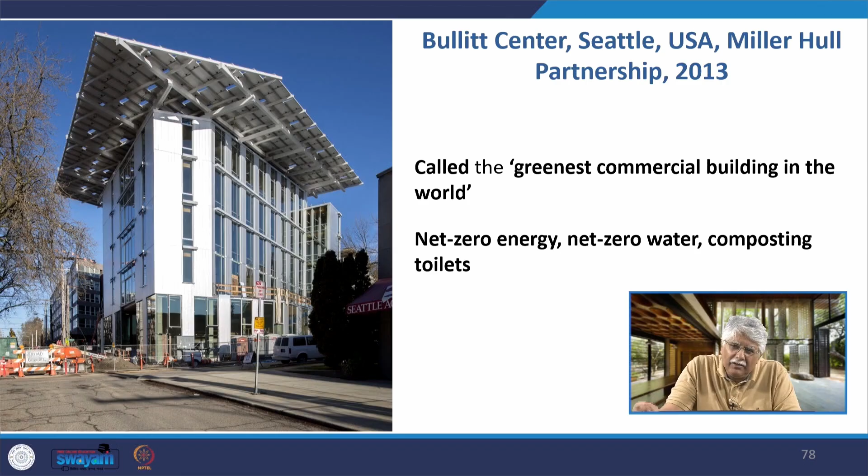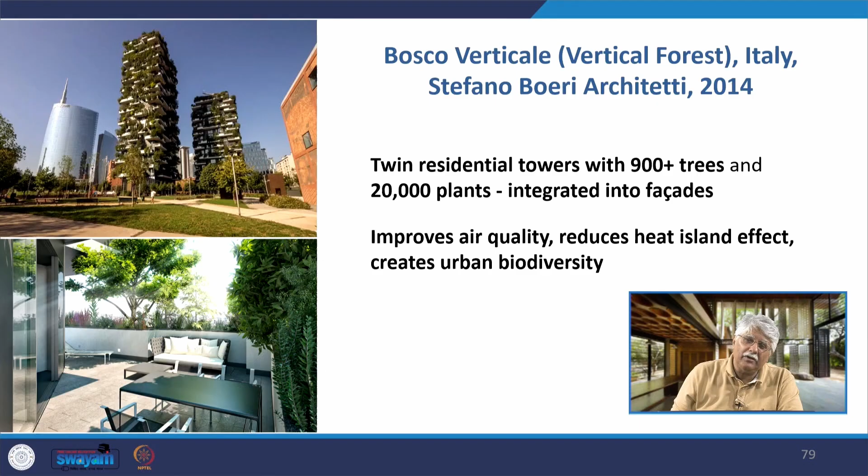Some examples of contemporary green buildings that we have, and we can see how fast we have moved in the way green buildings are being designed today, like the Bullitt Center in Seattle, called the greenest commercial building in the world: net zero energy, net zero water, composting toilets. The Bosco Verticale, the vertical forest that we just saw: twin residential towers with 900 plus trees, 20,000 plants integrated into the facade, improves air quality, reduces the heat island effect, and creates urban biodiversity.

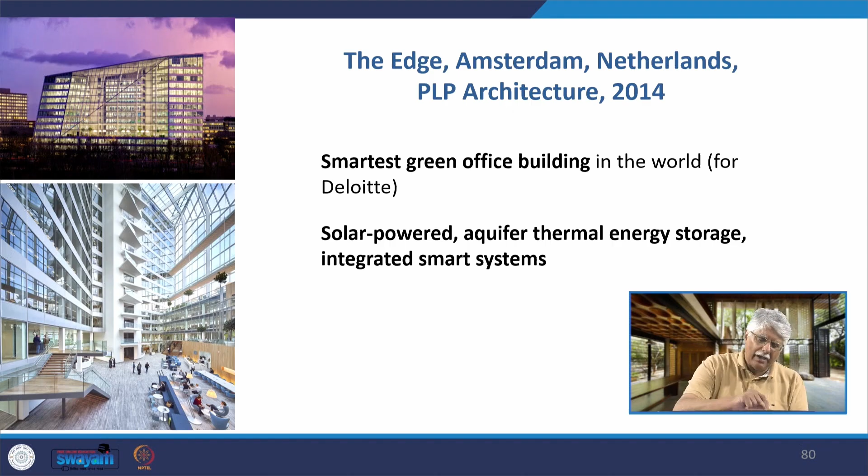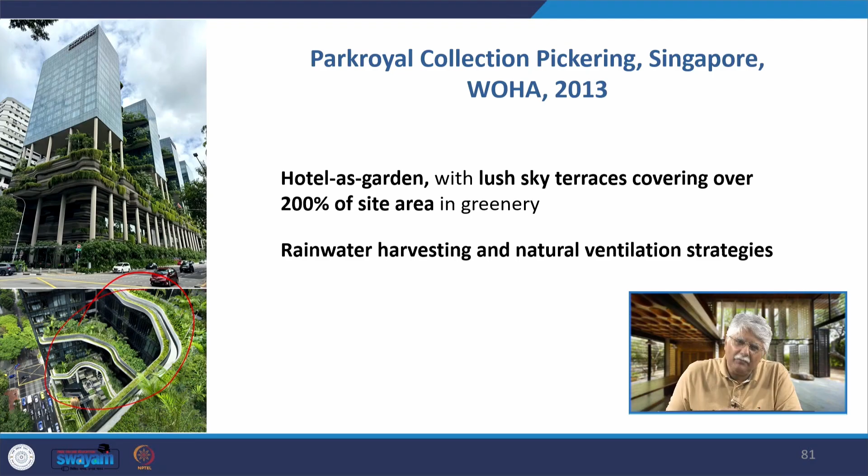The Edge in Amsterdam, which is considered to be the smartest green office building in the world, for the Deloitte company: solar powered, aquifer thermal energy storage and integrated smart systems. If you recall, a few lectures back I talked at more length about this building. Then there is the Parkroyal Collection Pickering in Singapore, a hotel in a garden with lush green sky terraces covering 200% of the site area in greenery. Rainwater harvesting and natural ventilation strategies have been used.

Thus we find that green buildings have come a long way today, and far more strategies are being employed. A lot of research is being done to make our buildings more and more sustainable, more and more low carbon, more and more green. Thank you.